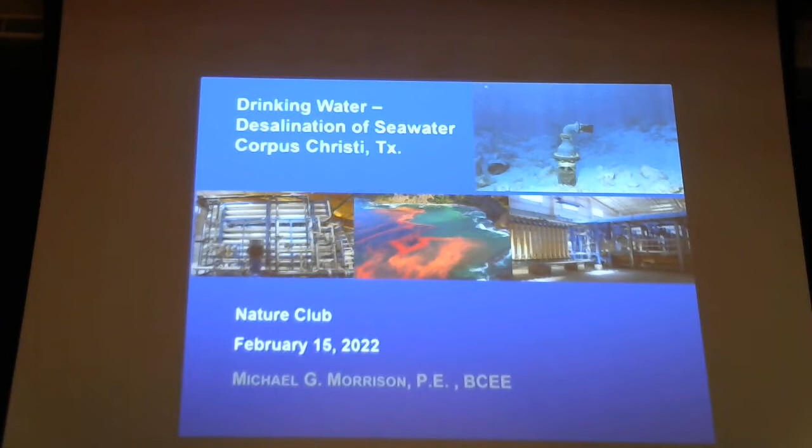All right, the topic today is turning seawater into drinking water. I'm presently working on the permitting for the city of Corpus Christi for the first seawater desalination plant in Texas, and I wanted to use this as an educational tool and also to introduce what we're doing in Corpus Christi.

The Texas Water Plan, which is put out every 5 years, has a statement that says the primary message of the state water plan is simple: in serious drought conditions, Texas does not and will not have enough water to meet the needs of its people, its businesses, its industries, and its agricultural enterprises.

This is an important issue as we get in, especially for Georgetown. We're really looking at long-range water supply.

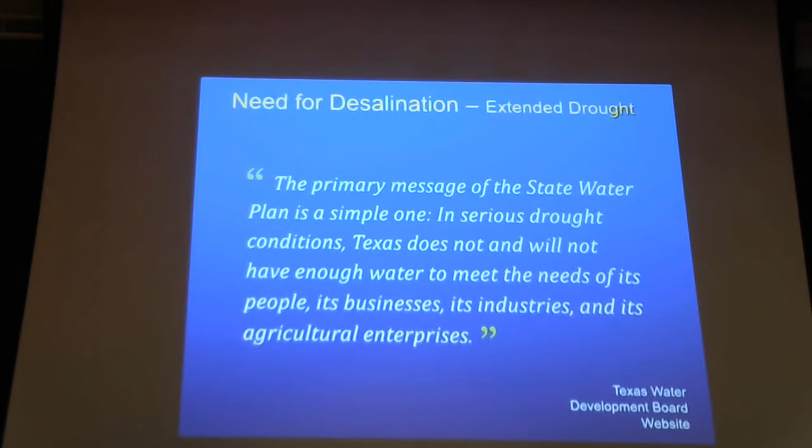One of my favorite quotes is by John F. Kennedy, where he said, if we could ever competitively at a cheap rate get fresh water from seawater, that would be the long-range interest of humanity and would dwarf any other scientific accomplishments. I fully believe that, and we're getting very, very close to that coming true.

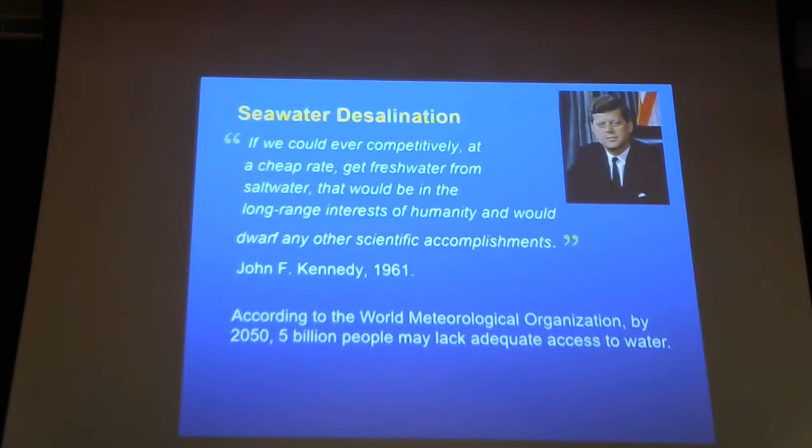Also, the World Meteorological Organization projects that by 2050, there'll be 5 billion people who will not have adequate access to available water supply. So this is an issue that I think affects all of us.

What has held back seawater desalination? The cost. It's expensive. Probably everybody's heard it's expensive. By 1970, the cost of seawater desalination was about $19 per 1,000 gallons produced. Today, we can get it under $4 per 1,000 gallons produced, an 80% reduction in the cost of seawater desalination over the last 50 years.

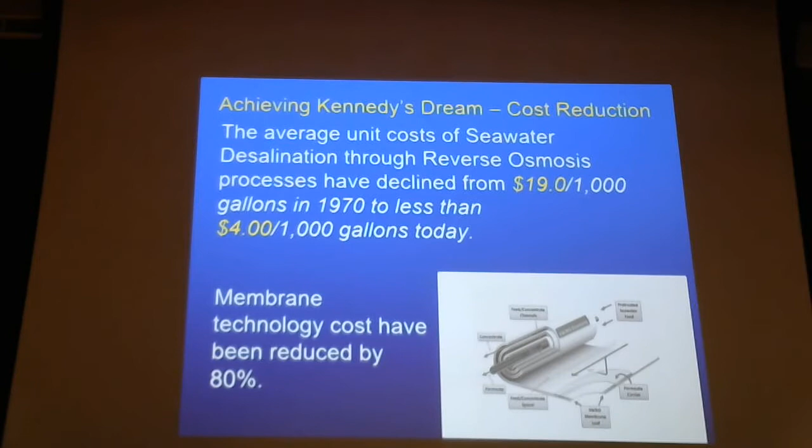So now it's getting down where it's competitive with other types of water supply sources, especially like in Corpus. We had to go hundreds of miles to the Colorado River to bring that water to the city, and we built 2 reservoirs, which are very expensive. So this is becoming economically viable.

Also, another important feature of desalination is the energy cost. What you're going to learn is that when we desalinate, we have a membrane, and we push salt water through that membrane. That membrane is so tight it's one millionth the diameter of a human hair. It will reject the sodium ions, the calcium ions, the chloride ions. But it takes a lot of pressure to push that water through that very tight membrane, and the cost of that pressure has been an obstacle for seawater desalination.

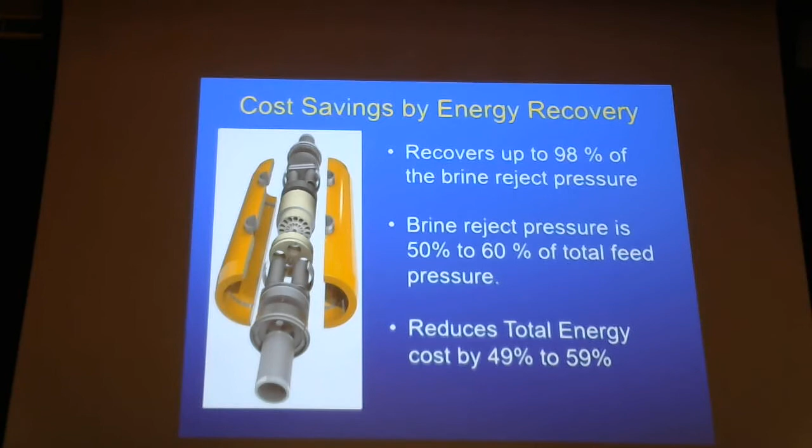Now technology has advanced to where we have energy recovery devices that are very, very efficient. We can recover about 98% of the energy we put in to push that water through the membrane, and use that energy back. That's reduced the cost of desalination energy by about 49 to 59%. So those two things have really started driving seawater desalination.

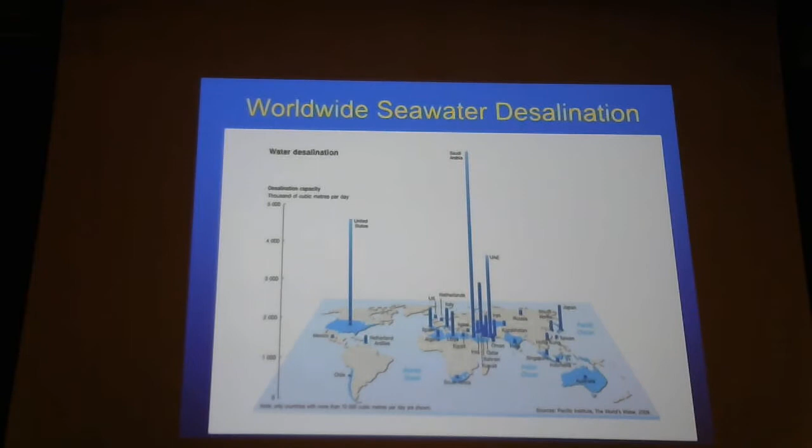So now, for a couple of reasons: one, the costs are now competitive, and also the need for fresh water, especially in places like Israel and the Middle Eastern countries where they don't have fresh water supplies, this is a viable alternative. So you see how plants are starting to spring up.

Talking a little about how the process works, it's called reverse osmosis. We start with osmosis, which is a natural law. If I have a solvent here with a high concentration and a solvent here with a low concentration of minerals, the natural law is that the low concentration water will try to dilute the water with the higher concentration, to bring it to equilibrium. It actually applies a force to do that, called osmotic force. Your body does that.

In desal, we take the higher concentration salt water and apply pressure to push it through a membrane into less concentrated water. Not only do we have to force all that water through the very tight membrane, but we have to overcome the osmotic pressure of it. That's why it's called reverse osmosis, because we're reversing the osmotic pressure. We take high pressure, high concentrate water and push it through that membrane into low concentrate water, and that's the water we have as permeate, or the drinking portion of the water.

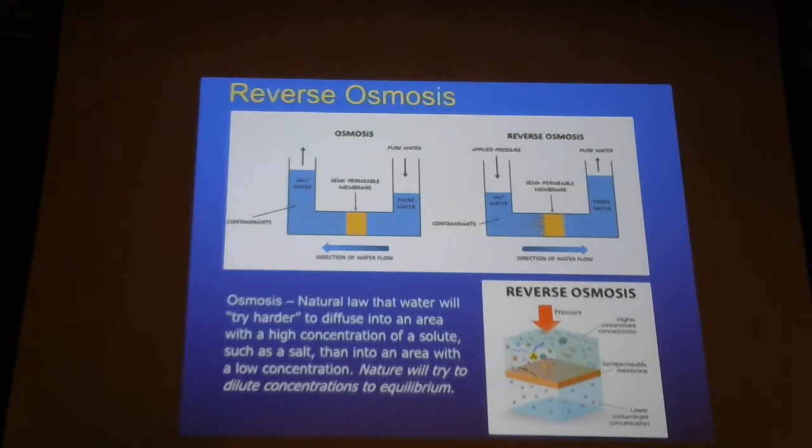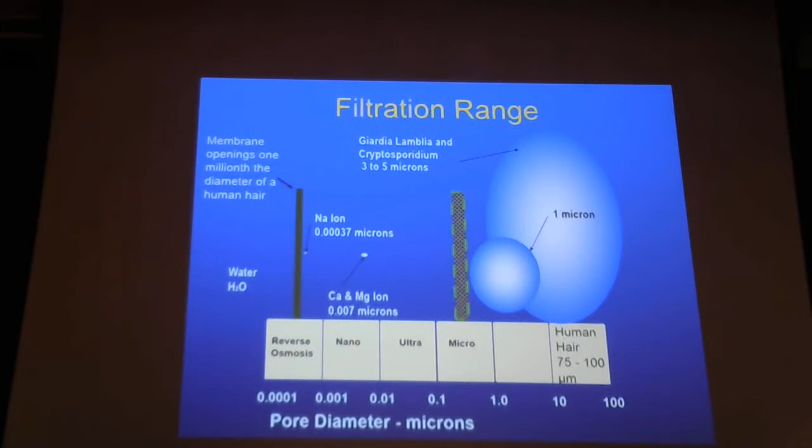This is an illustration of how tight these membranes are. That's a 1 micron size particle. We have membranes called microfiltration, ultrafiltration, nanofiltration, and then reverse osmosis. With the reverse osmosis membrane, we're trapping these ions—they don't even get through it. The only thing that gets through is small molecular weight, like the water molecule.

How a membrane plant works: we have pretreatment. We take an intake from the ocean here, then through pretreatment, usually filtration, like they do at a conventional water treatment plant. Then we take it up to the reverse osmosis membranes.

These are very tight membranes that we push the water through, and it's only going to let water go through. Everything else is trapped behind it, and what's trapped behind it is called brine, which we reject out into the ocean.

We're going to talk a lot about that, because that is the environmental consequence of desalination, and that's where we want to really get the facts out.

But then the clean water, where all the particles are taken out, goes into post-treatment. Because we took all the minerals out, and your body still needs minerals, we don't want to take everything out of the water. Also, it lowers the pH, so we want to adjust that, add some stabilization chemicals and alkalinity back into the water, and add some magnesium and calcium back so we have a healthy blend of water.

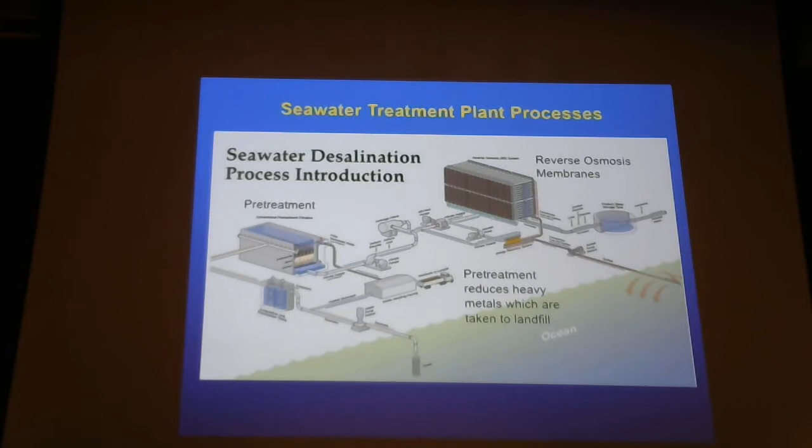On the pretreatment side, the stuff that we take out we haul to landfill. A lot of that includes heavy metals, so we're actually cleaning up some of the water by removing heavy metals and sending them back to the landfill.

This is kind of how a seawater membrane process works. For every gallon of water we get out that we can drink and use, it takes 2.7 gallons of seawater coming in. We get 1 gallon of usable water, and we have 1.7 gallons that we have to discharge back into the receiving ocean.

Now, I did an example for a 20 MGD treatment plant. That's what we're designing in Corpus Christi, a 20 million gallon per day water treatment facility that takes seawater and turns it into drinking water.

Out of that 20 MGD, we're going to take 54 million gallons per day of water out of Corpus Christi Bay, actually in the Inner Harbor if you're familiar with Corpus Christi. We add 20 million gallons back into the water distribution system for everybody to drink, and return 34 million gallons of the salt back to the ocean.

Now, it's pretty important: the desalination process does not add any salt to the ocean. There's been a lot of articles saying a desal plant puts salt back in, but it doesn't add any salt. Matter of fact, we don't return all the salt—we return about 98% of it.

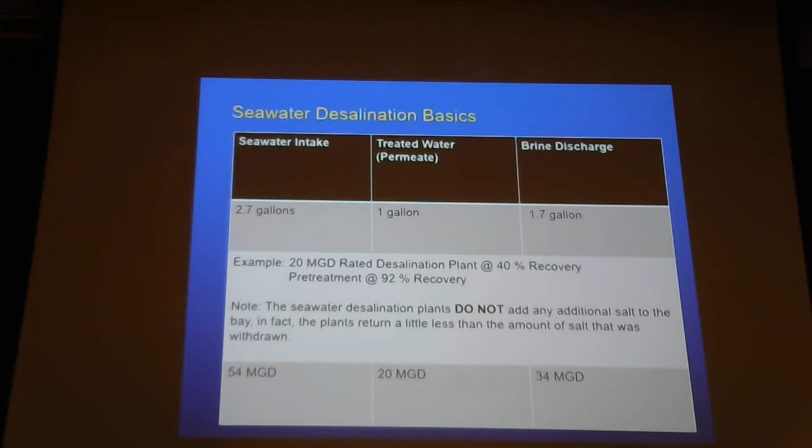But what it does do is concentrate the salt. So where intake might have a salt level of 31,000 milligrams per liter, the discharge may have 50,000 milligrams per liter—it's concentrated into a smaller flow stream. That's what we have to worry about, because aquatic life does not like rapid changes to salinity.

Let's talk about some of the plants that are operating and have been operating for a while. These are the plants in the United States with operating seawater desalination plants. California has the most—these are what I call the major plants, though they have some smaller ones too: Santa Barbara, Huntington Beach, and Carlsbad.

Carlsbad is a 50 million gallon per day facility, operating since 2015. Tampa Bay is the oldest facility in the United States, a 25 million gallon per day plant operating since 2007. In Corpus Christi, we have an industrial plant that's starting to operate now, and we're applying for permits for another right now.

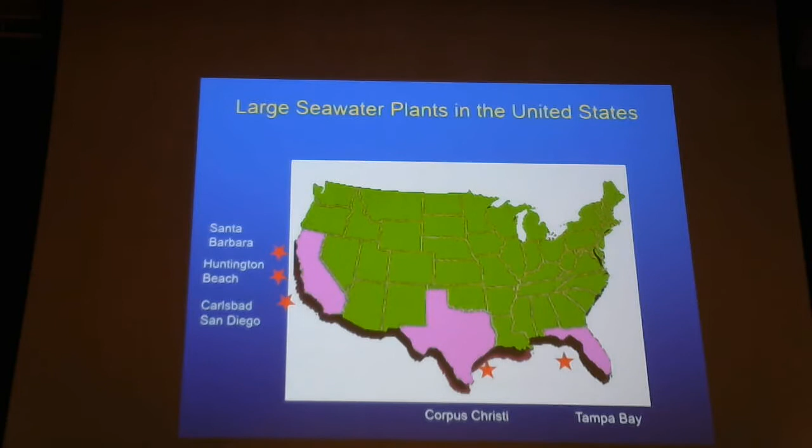This is the Carlsbad San Diego water treatment plant, where it produces 50 million gallons per day of water from the San Diego Bay area and then into San Diego. It comes in and is co-located with an existing power plant.

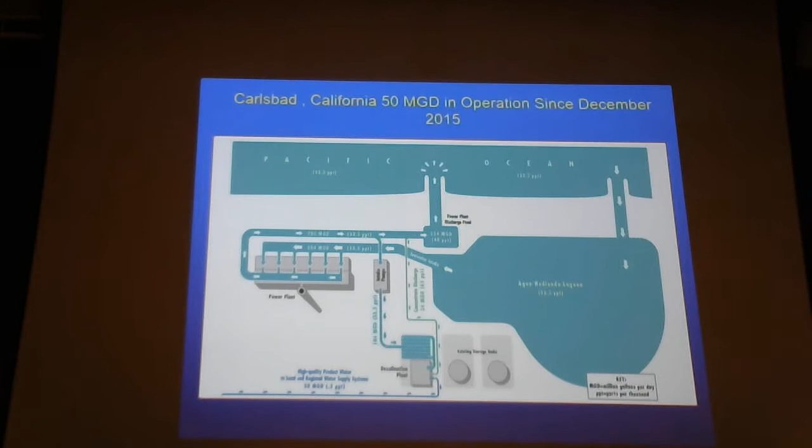It's using the existing power plant as blending for its discharge. So what it does is take intake water from the actual discharge of the power plant, run it through the reverse osmosis process, and then return the brine reject.

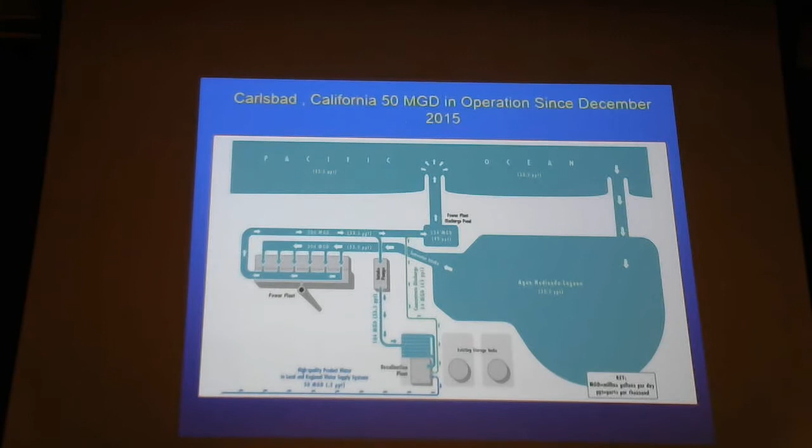The salt they took out is returned back to the discharge from the power plant. This does a lot of good, because it's taking this concentrated brine discharge and blending it with about 200 million gallons per day of reject from the power plant, which is a one-cycle-through power plant. So we're taking the high concentration and diluting it back down to a lower concentration. As everybody knows, the solution to pollution is dilution, so we are diluting it.

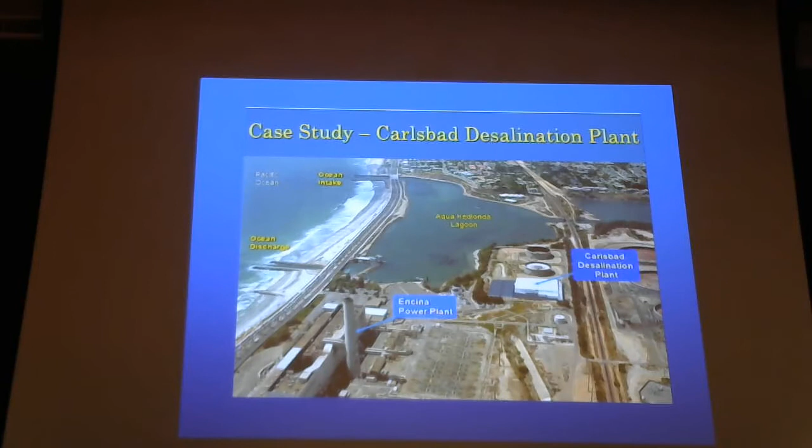What's also happening at the Carlsbad plant is that the power plant is going out of operation, and they wanted to maintain the same dilution ratio. So what they're requiring the Carlsbad plant to do is, instead of relying on the power plant, they still have to pump that much more water for blending. They're actually blending by recycling the same intake that the power plant would have used. The power plant's not there anymore, but you're getting the same amount of dilution from it.

And this is Tampa Bay, a 25 million gallon per day facility, and they're doing the same thing. They co-locate it next to a power plant so they can use it for dilution of their discharge. In this case they have a tremendous amount of dilution, 1.4 billion gallons from that power plant. So even if you put about 19 million gallons per day of brine in there, it's lost in the 1.4 billion gallons you're diluting it with. By the time it gets back to the bay, there's hardly any difference between it and normal bay water. That has worked out pretty well for them, as long as you have a power plant to do that.

What our concerns were in Corpus Christi, when we first looked at this in 2004, we did look at using their power plant — they have a Barney Davis power plant. But when you really look at things, power plants are going through a phase where a lot of them are being phased out. So if you depend totally on that power plant for dilution, you may not have it in a few years, and so we didn't want to go that route.

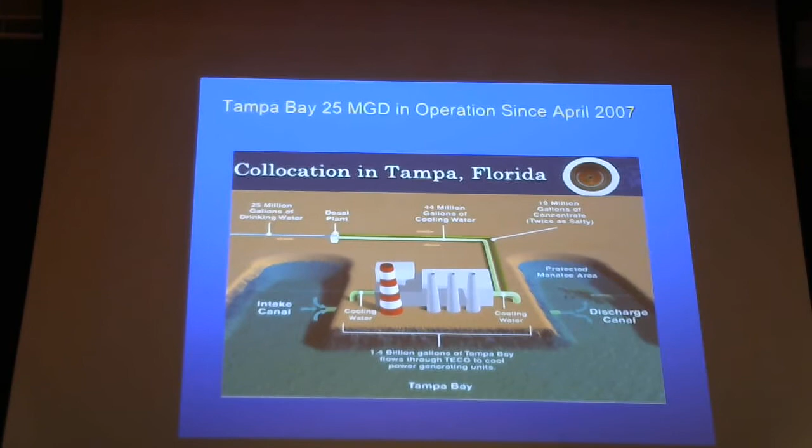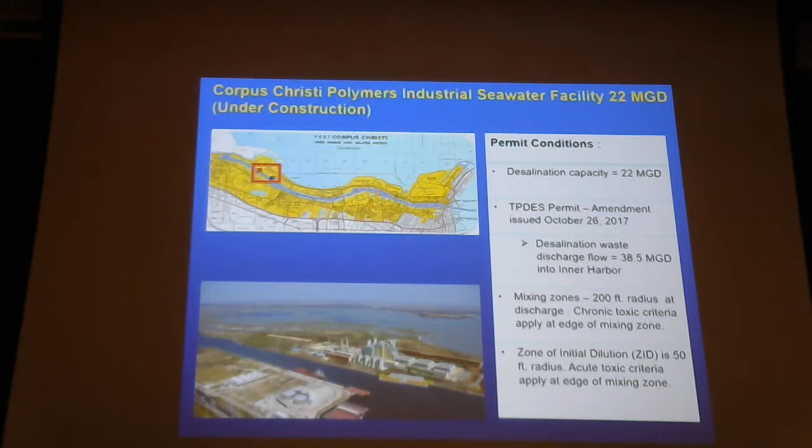They do not have to meet drinking water standards; they're using it for their process water, so it's much more relaxed regulations. But it is seawater, and it is discharge permitted — that's an important part. Their discharge, which is 38 million gallons per day, is already permitted for operations, not operating yet, but permitted.

This is what we're doing for Corpus. Corpus is really hitting it hard, because Corpus has this plant here under construction — the industrial plant — and it's already about 80% complete.

Then the city of Corpus Christi is applying for a permit in the Inner Harbor Ship Channel, which is what I'm working on presently with the Texas Commission on Environmental Quality. We've also, as the city, applied for La Quinta Channel for a 30 million gallon per day plant. At the same time, the Port of Corpus Christi, a separate entity from the city, has applied for two locations — one close to ours on La Quinta Channel for the port, and another for the port as well.

And then they have one at Harbor Island, which is a 50 million gallon per day facility they have applied for.

All 4 of these are going through permitting processes right now through TCEQ, and that has been a long process. Since this is going to be the first municipal seawater plants in the state of Texas, TCEQ is really taking their time because they don't have any regulations for it. So we're helping them develop regulations by looking at regulations from California and other countries on how they handle this. The main issue is to protect the environment and protect the aquatic life.

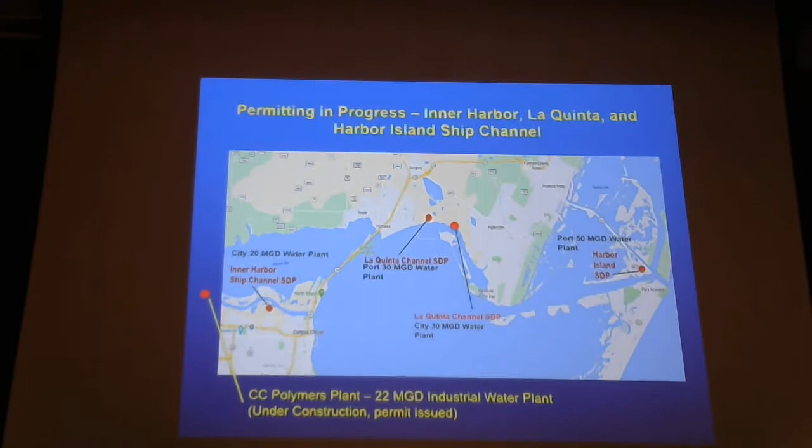Part of the Texas regulations allows all dischargers that discharge anything, wastewater, any kind of discharge, to have what we call mixing zones or regulatory mixing zones. TCEQ uses 3 different types of mixing zones. One they call the ZID, Zone of Initial Dilution, and that's a 50-foot radius from the discharge.

They want you to allow whatever you discharge to be mixed, because all our modeling is really based on dilution. So you got to get it out into the water so it starts to dilute. 50 foot is a pretty small radius, 50 foot out that way, so it's 100 foot across. It's a fairly small area. They call that the zone of initial dilution, and they have certain criteria.

One is the aquatic life criteria, which is called an LC50. In this zone you have to have at least 50% survival of certain species. You have to do what we call a wet test, a toxicity test, to make sure you're meeting that criteria. When we get up to the mixing zone, which is a 200-foot radius, then you can get down to...

...what they call chronic conditions for aquatic life. That means they have to maintain the same body weight, and you have to have the same number of broods for each of the species we're selecting. So there's a lot of other criteria that you have to meet.

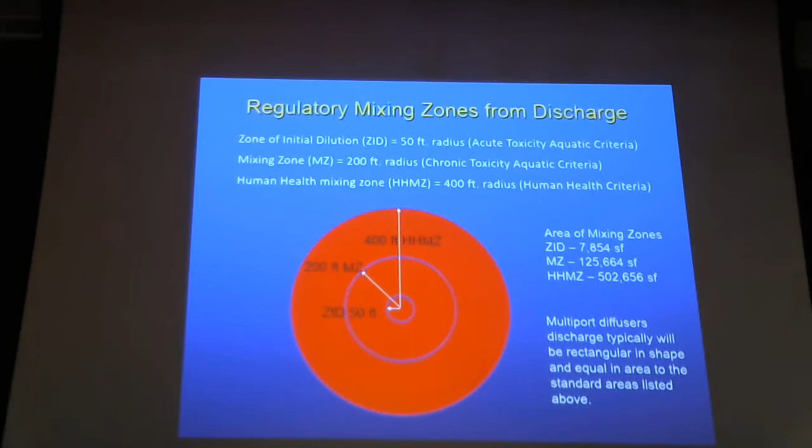Now we get down to where we have the water. This is our actual discharge. We have what we call 30 MGD for the Inner Harbor maximum and 40 MGD for La Quinta maximum. And we have what we call recovery rates, which is just how much of the water we think we could recover. These particular membranes operate between 40 and 50%, so we could have a 40% recovery rate or a 50% recovery rate.

What we get down to, this is the effluent from a 30 MGD. If we had 40% recovery, we would have an effluent quantity of 51.4; if we had 50% recovery, we'd have an effluent of 35.1 MGD. The effluent salinity that we discharge is 49.9 parts per thousand, or 49,900 milligrams per liter, and for 50% recovery it's 58.4 parts per thousand.

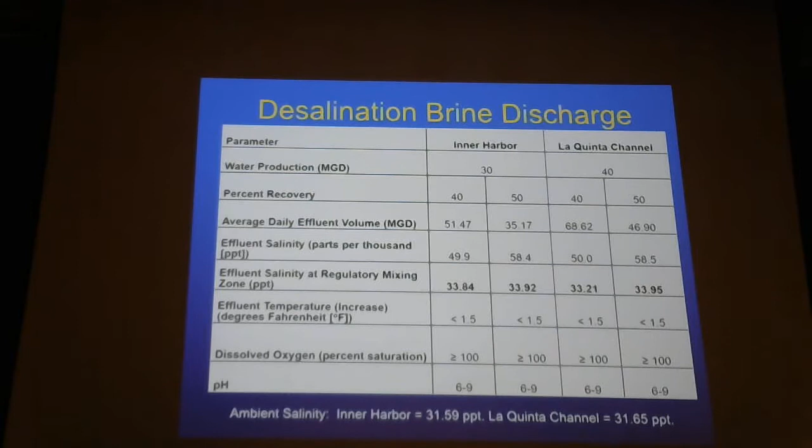I'll cover this really quickly. What the environmental concerns are for desalination plants, there are 4 of them. The first 2 have to do with the intake: impingement and entrainment. They don't want you to trap aquatic life on your intake screens, and they don't want you to suck them into the system where they die. So those are the 2 we have to deal with.

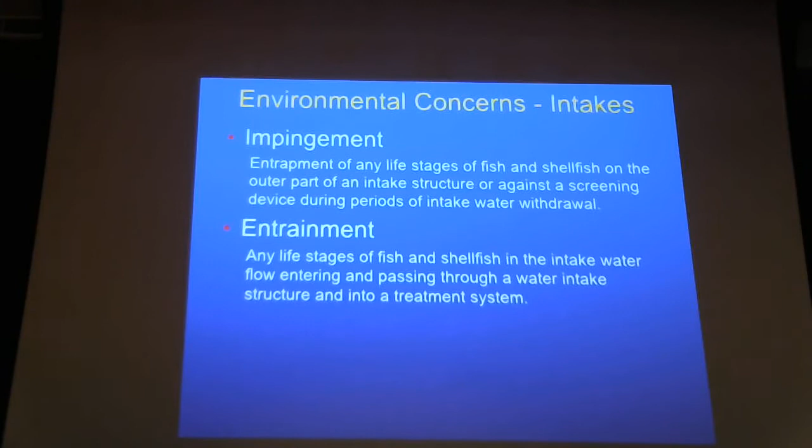What we're doing is putting in what we call wedgewire screens. These screens have an intake velocity of less than 0.5 feet per second, which is about 0.3 miles per hour. You can walk faster than that, so fish just swim by it. You don't have any pulling force to trap them on the screen. So we have, in essence, removed all of the impingement requirements that EPA wants.

This is called best available technology. We have a screen opening of less than 2 millimeters. What we're doing corpus is 1.75 millimeters, that's the thickness of a dime. That traps 99% of all the aquatic organisms that might be floating around out there. So using EPA standards, we have eliminated both entrapment and entrainment.

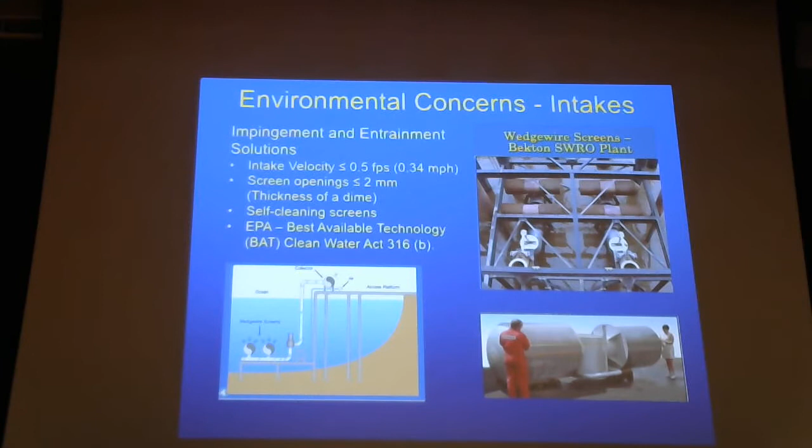The other things we have to worry about from a regulatory standpoint are hypoxic conditions. This is where, when you put more salinity into the water, it reduces the water's capability of dissolving oxygen. If you had a glass of water with no salinity, you'd have about 9 milligrams per liter of oxygen naturally dissolved. Put 31,000 milligrams per liter of salinity in there, now suddenly we're down to about 6 milligrams per liter of oxygen dissolved. So the salinity reduces oxygen, and if you reduce it low enough, you get hypoxic conditions. The organisms need that oxygen.

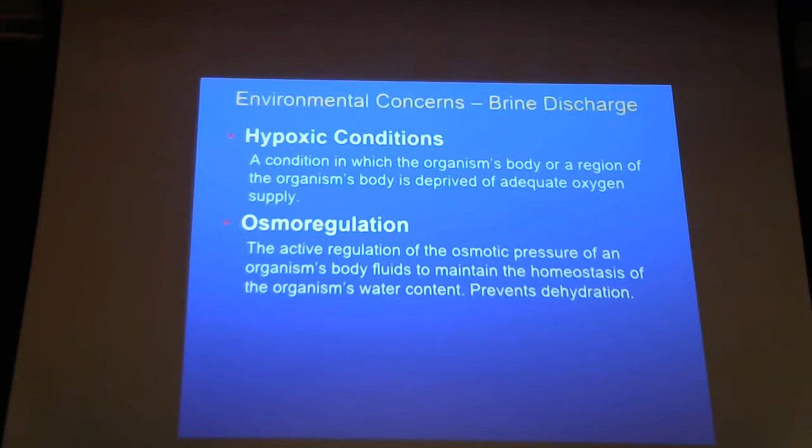The other issue is with osmotic regulation. As we went through what osmotic pressure is, aquatic life has that too. If I increase the salinity outside of that fish higher than what it's been, that can actually suck water out of the fish and dehydrate it. So you don't want such high salinities that you overcome the natural ability of the organism to do osmotic regulation. So those are the two issues we need to address.

The old method of disposal, and where desal got its bad name, was from open discharge methods. Bill had a picture of the Monaco plant where you can see the brine go straight out into the ocean. That's an open discharge. What an open discharge does, it's a heavy brine, 50 to 60 grams per liter, and it doesn't dissolve. It stays as heavy brine, goes down there, and because it's high salinity, it drives out all the oxygen from the water and creates hypoxic conditions, or could create a hypoxic condition. And we don't want that.

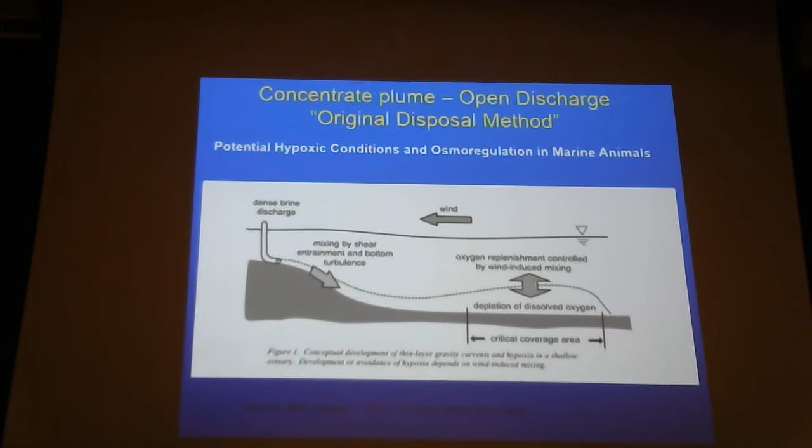But these conditions have been created by this method, so we had to come up with a better way to do it. And we did. This is the better mousetrap: jet diffusion. We take the brine and inject it with high pressure jets into the water. When these jets go into the water, they disperse very rapidly, so we dilute really, really quickly.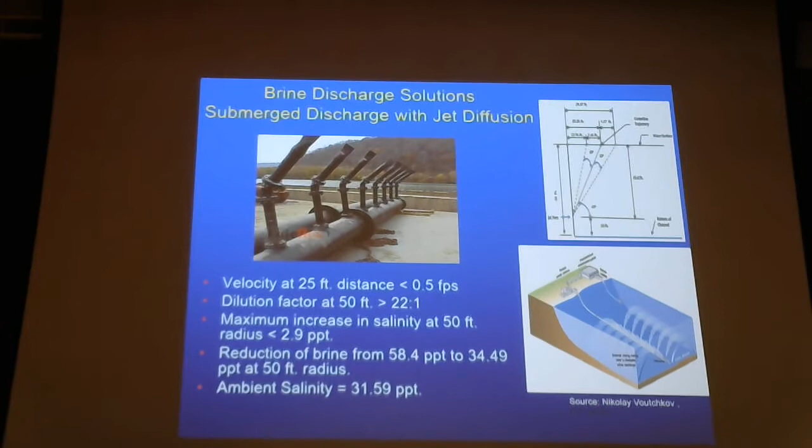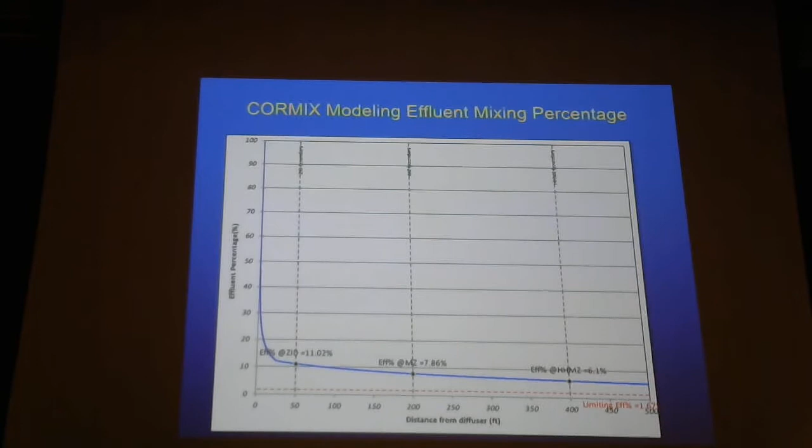This is velocity, showing how quickly it dissipates. At 25 feet, we're dropping down to well below 0.5 feet per second.

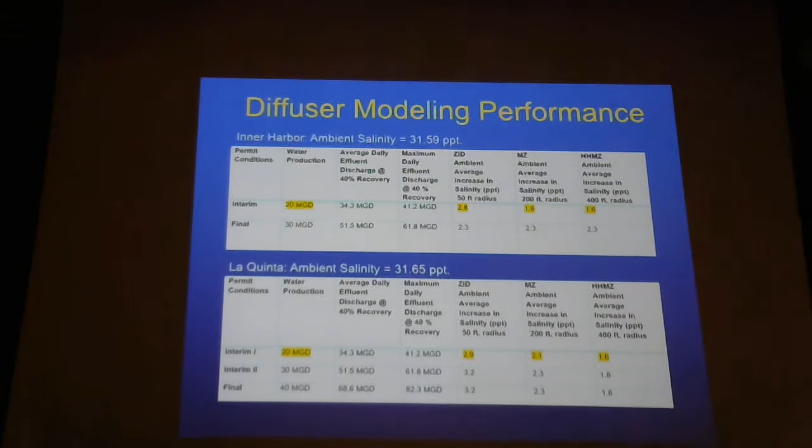These are our final numbers. We have the permit conditions for 20 MGD in Inner Harbor. We have a discharge of 34.3 million gallons per day, with a maximum of 41.2. At the zone of initial dilution, a 50-foot radius, we increase salinity by 2.8 parts per thousand—going from 31.59 parts per thousand up to about 34.4 parts per thousand, so a very slight increase. But by the time we're down to the 200-foot mark that regulators look at, we're at only a 1.6 parts per thousand increase in salinity, which is not a very large increase.

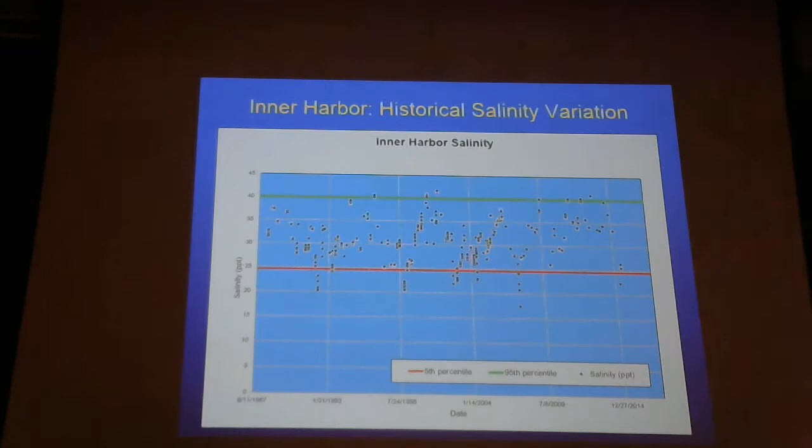We took the historical data of salinity for Corpus Christi and Inner Harbor over 30 years, and this is the range between the 5% and the 95% numbers. You can see how salinity naturally varies a lot, so if you have a 1.6 parts per thousand variance, that's not even going to come close to the natural variance that the bay has with any seasonal change.

For conclusions, I'd just like to conclude that seawater desalination is drought-proof and allows us to tap into the other 97.5% of the water on this planet, which is going to be important. Seawater desalination is affordable if the plant sizes are selected appropriately.

Energy costs are reasonable and will improve with renewable technology, and that's what we're also looking at—doing solar and other types of renewable technology, even wind. Seawater desalination is environmentally safe if plant intake and discharges are designed appropriately.

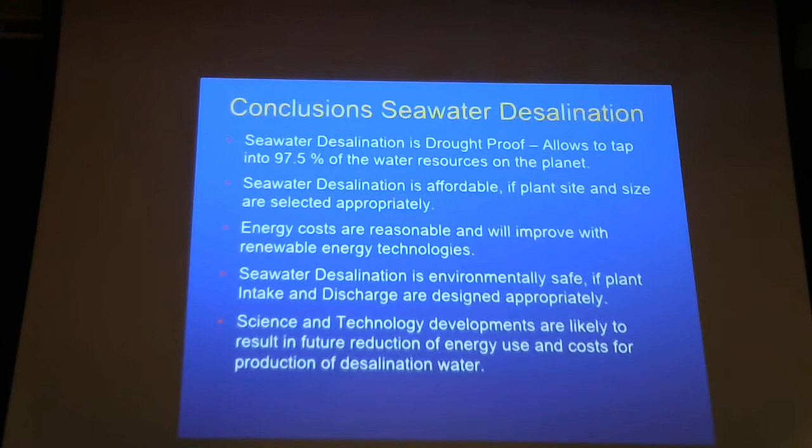Science and technology developments are likely to result in future reductions of energy use and cost for producing desalination water, which I think we're going to be faced with in the future. We're going to see more and more desal plants come. It just needs to be done in the right way. With that, I'll open it up to questions.

What percent of Corpus Christi's needs for potable water does the 50 million gallons cover? We do take care of a pretty good chunk of it. Right now their existing usage is around 200 million gallons a day—that's what their plant's rated at. The O.N. Stevens water treatment plant. Another 50 is looking at industries that might move in and other industry uses. So they think it's going to take them out to the 2050 guideline.

Does the water have to be a certain temperature for desalination? No, it doesn't—that's a great question. One thing I didn't mention is that one of the reasons, when desalination first started, they wanted to look at putting these plants co-located with power plants, because once-through power plants reject hot or warm water. Warm water is really good for desalination because of the membranes.

This membrane works on the viscosity of water. As you remember from chemistry, viscosity is inversely proportional to temperature—the lower it gets, down to ice, it's very viscous, or up to steam it's not viscous at all. So the warmer it gets, the less viscous, and the easier it is to push that water through the membrane. So the warmer the water, the better. It will operate over the entire temperature range we have in Corpus Christi, but it operates more efficiently at higher temperatures. We like to operate it during the summer because it costs less, and in the winter it costs a little more because of the viscosity of the water.